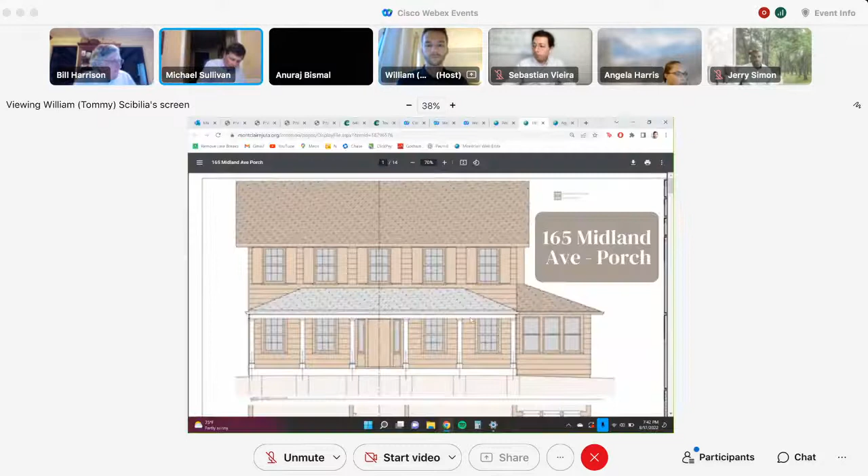My architect Daniel is on the line as well, in case he's needed. Did he call in, or did he? He called in by phone.

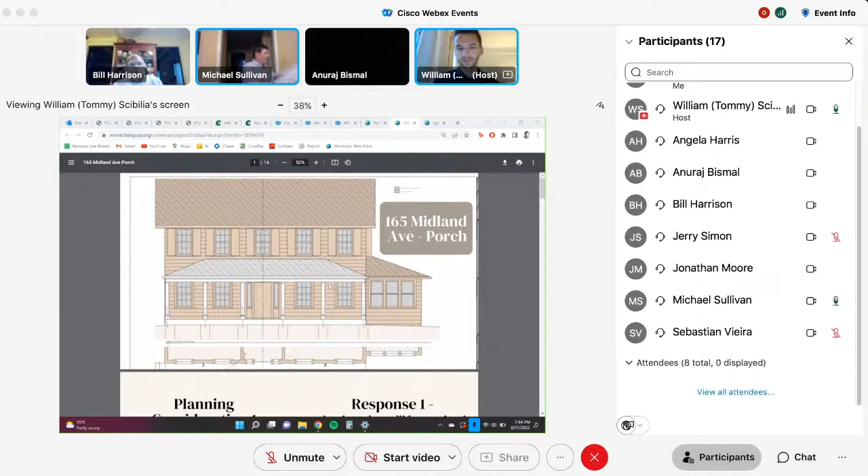Hello? Hello? We can hear you. All right, thank you. For some reason, the WebEx identification I was given was from last month, so I was trying to dial into the WebEx, but you've got me here instead.

Would you raise your right hand? Do you swear to tell the truth in the matter pending before the board? I do. State your name and address, please. My name is Daniel Kopek, 289 Bay Avenue, Glen Ridge, New Jersey. Mr. Kopek, you're a licensed or registered architect in the state of New Jersey, is that correct? That is correct. And your license is in good standing? It is. And you've presented before this board in the past.

I don't know if the applicant's going to present or you're going to present, but whoever is going to can start now. Okay, I'll start and you can chip in as needed. In this presentation, I took the planning considerations that were given to me, and I've prepared a set of responses. What you're seeing here is just an image of the drawing of the porches at the front of my house on 165 Midland Avenue.

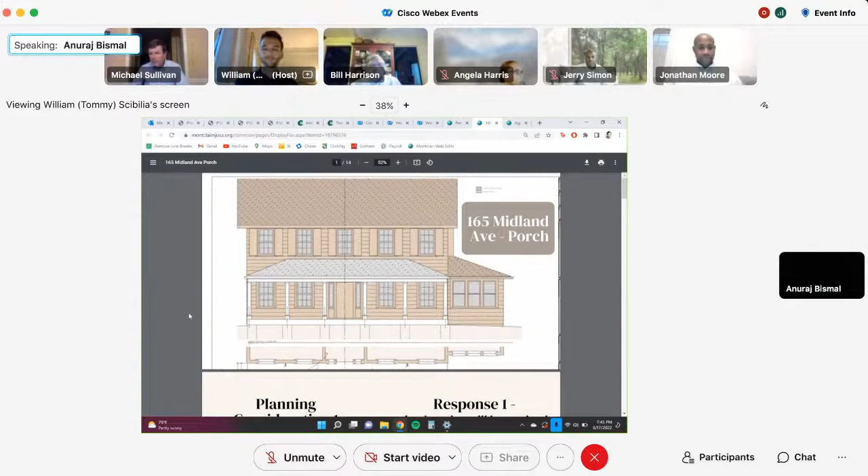On the next page, you'll see the response to planning consideration 1. The consideration is that the north property line contains a landscaping buffer between me and my neighbors, and it was unclear what we're going to do with that buffer. I've agreed with my neighbor that it's been there ever since I purchased the home in 1997, and we have no plans to change that. Her name is Christy Payne, and on the next page you'll see an email from her where she has responded back in agreement with that. So no plan changes to the landscaping buffer. I'll pause there if there are any questions on that. You can proceed. Okay, thank you.

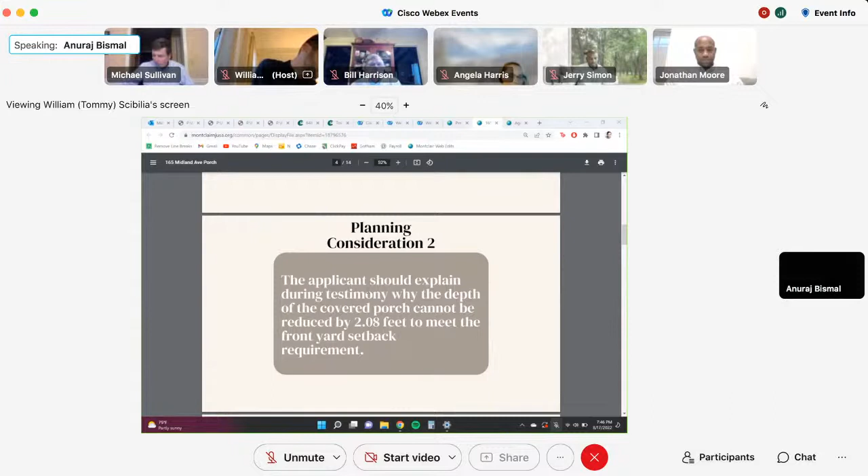Planning consideration number 2 is around the applicant explaining during testimony why the depth of the covered porch can't be reduced by 2 feet to meet the front yard setback requirements. There are 3 responses here. The next page is response 2.1. The first response is that the dimensions of the porch were designed to allow the inclusion of a dining table and chairs with sufficient access. I've shown a picture later in the deck of that table with the tape measure out at 10.5 feet, so if you want to flip down to that photograph, it's the one with the table and the red line. So it was designed with this in mind, for outdoor dining.

So we go back to the top. The second part of the response, 2.2, is that the extent of this variance varies along the front portion of the home. It's about a foot at the south end of the home and 2 feet at the north end, and this is because the house is not straight to the street, it was built a little crooked. You can see that if you flip down to the very last page, you'll see the diagram showing the red variance is narrower at one end and wider at the other, because the house is not parallel to the curb.

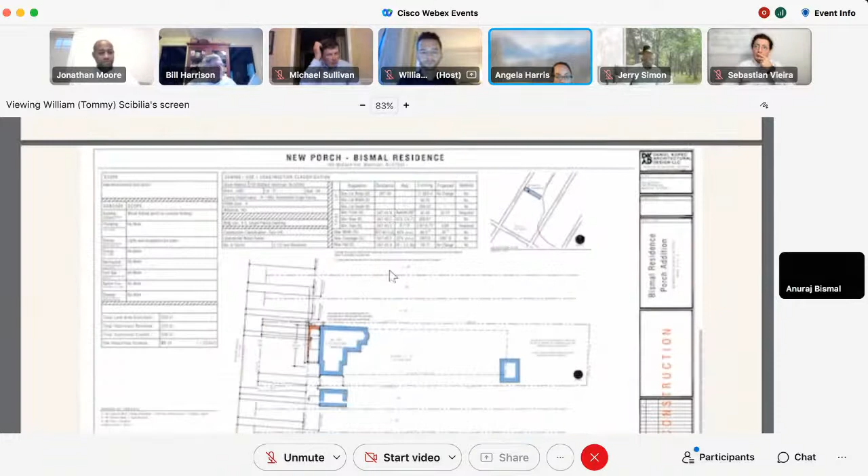So this is Dan Kopek, the architect. The existing home is a center hall colonial with a side gable facing Midland Avenue, with a central portico and steps, 2 steps down to grade. The intent is to remove that central portico and replace it with a porch that runs the width of the primary 2-story volume of the home. The porch wouldn't extend to the 1-story sunroom on the south side.

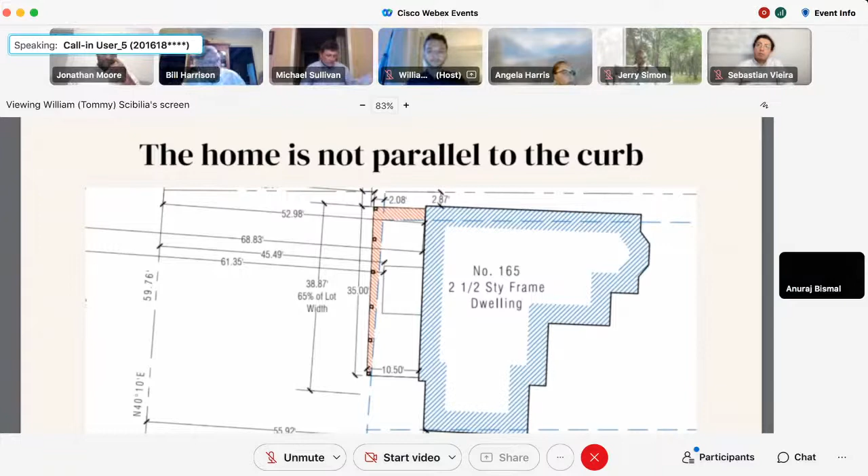The reason we're seeking the variance, as my client has enumerated, is the porch design would encroach on the average front yard setback, by less than a foot on the south side and slightly more than 2 feet on the north side. Given the existing placement of the home—and I'm referencing drawing number 2, the site plan on sheet G-100 in the submitted drawings—that drawing shows the site plan and a dashed red area of the porch that is both over the front yard and side yard setbacks.

Given the location of the current home, particularly the side yard setback, can't be met while making the porch properly fit the balance and symmetry of the existing structure.

And could the porch be made a little bit narrower on the front facade of the house by just spacing the columns differently, so that you can get closer to the side yard setback?

I worry—if we go to the second sheet in the submitted drawings, A-100, drawing number 1, the west street elevation—you'll see that the way the project has been designed, the columns line up between the windows and the door.

Structurally, I was very careful to make the project as minimal to the north side as possible, so the roof slopes back on that side. If I were to bring the north edge of the porch within the side yard boundary, that column would land in front of the window, which would mean the beam carrying the weight of the porch would come back into the building along the top of that window. Structurally speaking, we can physically make that happen, but it would just not look structurally correct to have the weight of that porch landing on the head of a window.

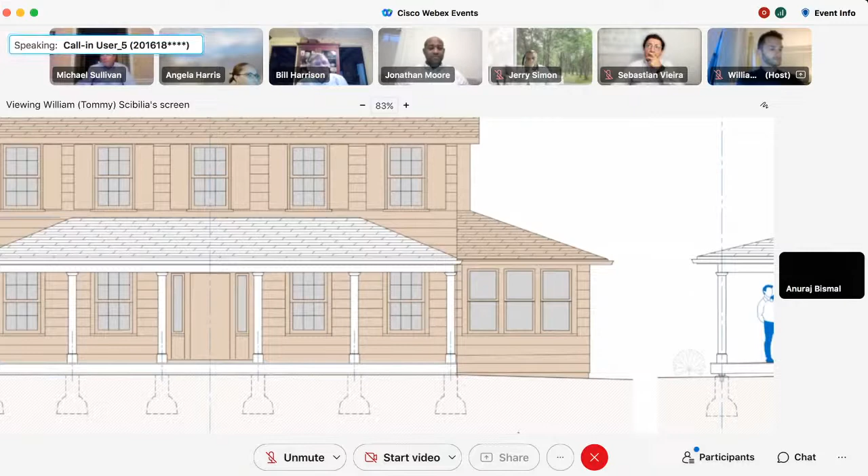Okay, thank you, I have no further questions. Okay, Mr. Moore, do you have any questions? No questions at the moment. Mr. Simon?

Yes, thank you. The current steps, are those within the side yard setback? No, the current stoop, yes, as shown, you can see it on the same sheet, A-100, drawing number 2, floor plan. You see the dashed line of the existing stoop in the middle there with the 2 columns that would be removed. That's only at the front entrance door, and it extends out about 7 or 8 feet from the house, and that's currently not in compliance.

It is currently in compliance. It is in compliance, okay. The front stoop is in compliance. The house is currently not in compliance because the house is built both too close to the north and south side yard setbacks, as you can see by going back to sheet G-100. I'm just referring to the porch right now. I understand the second, correct.

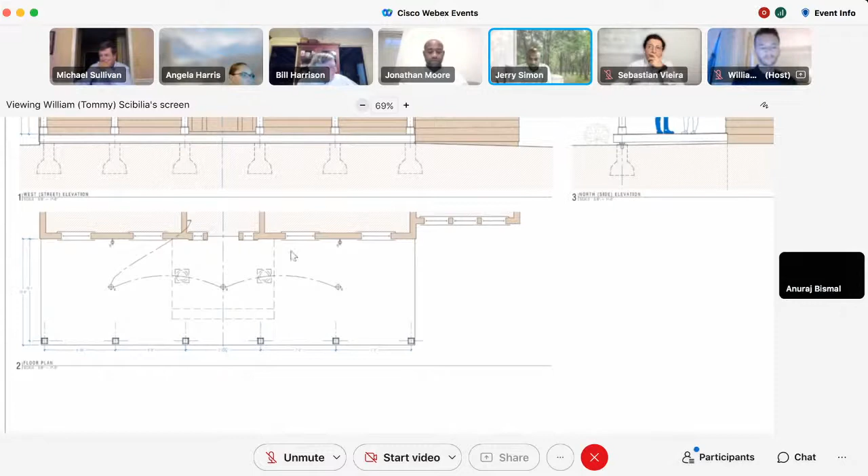All right, so regarding the neighbors' porches which the applicant referenced, do you know if those houses are set further back than yours, which would allow their porches to be in compliance? Are they all starting at the same level? On drawing number 2, site plan, on sheet G-100, I went out and measured physically from the curb to the front of the house and front of the porch of the properties, both north and south.

I shot that with a laser from the street, and where I got permission from someone, I used a tape measure to measure those. I measured those at one point, and as my client mentioned, his house happens to not be perfectly parallel to Midland Avenue, so it's possible there's some variation there. But those dimensions on that site plan were made by me in the field, both to the front face of the structure and the front of the stoop or porch, and that established the front yard setback, as I understand it from the municipal ordinance, to be the average of the 3 properties on either side of you on your side of the street.

So are they effectively at the same starting point? Well, you can see lot number 34, which is on the bottom there, is about 2 or 3 feet beyond the average. Lot 35 is slightly beyond the average. Lot 36 is about 2 feet inside. Lots 38, 39, and 40 are almost all exactly on that average line. So there is some variation.

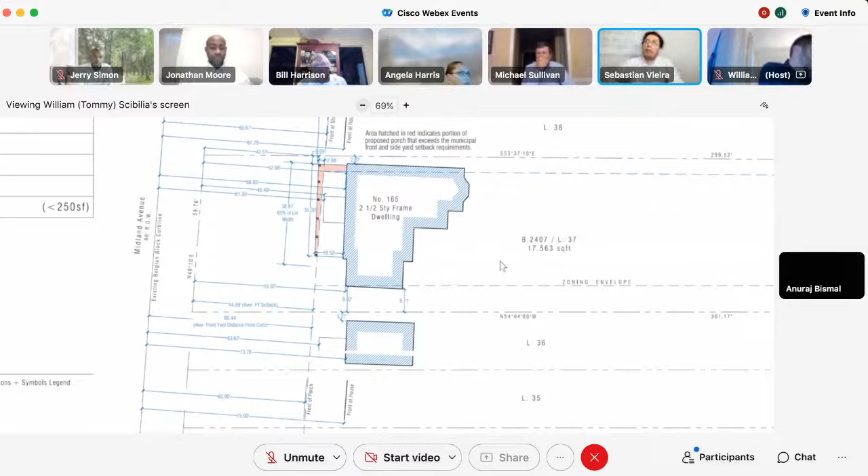Okay, thank you. Mr. Vieira, do you have any questions? Yes, thank you, Mr. Chairman. Just following up with what my colleague, Mr. Simon, asked regarding planning consideration number 3.

In your response, you say that the porch's northern line will bisect one of the windows. So my question is, did you consider another design where you essentially eliminate the 2 columns on both sides and basically shrink the length? Was that ever considered?

We looked at several different options here from a typological condition. Most of the homes, as shown in some of the photographs that my client has submitted, have either an entrance portico that covers just the central bay over the door, or a front porch that spans the full front of the house.

In my experience, I have not seen a porch that would span 3 of the 5 bays of the front of the home and look like an accurate proposal to add to a home like this. It's my intention as an architect who practices in town to make something that is complementary to the existing historic structures here.

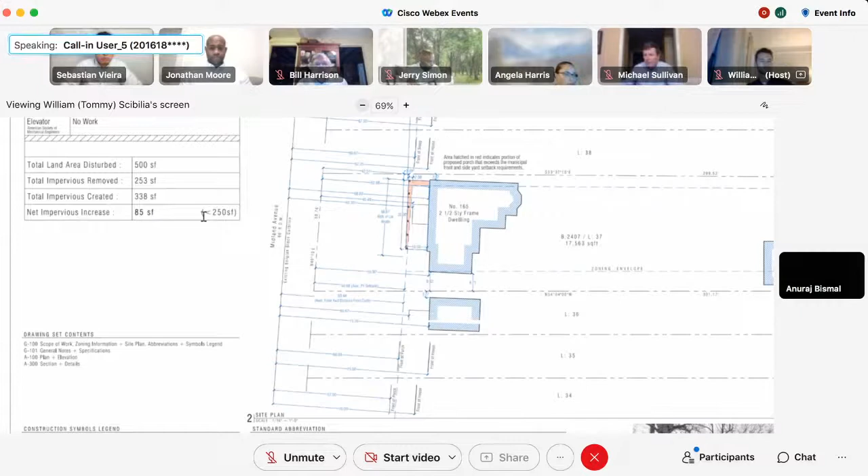Water would be distributed out into that same space. I don't foresee a stormwater issue from this improvement. Okay, thank you.

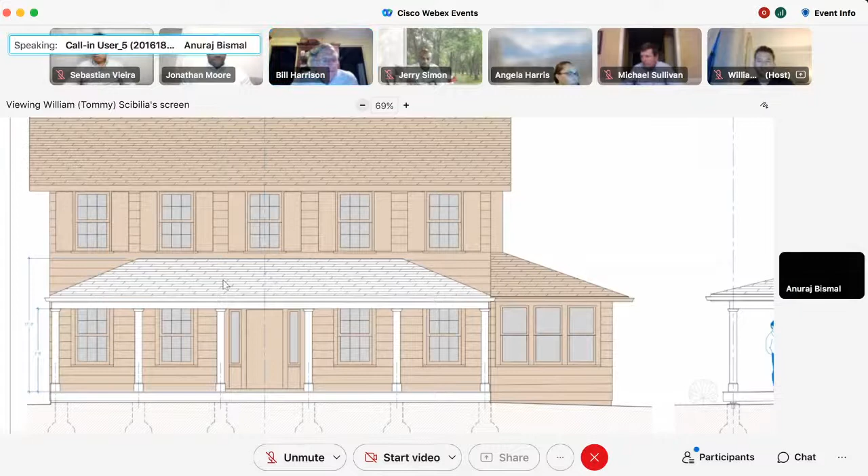Okay, I have a couple questions. Let me follow up on the stormwater. The pavement that's being removed is on the south side of the house, is that correct? Largely on the south side? It spans across, but it is mostly on the south side.

Okay, so just so I understand in terms of not being much of a net increase in total stormwater, but what is happening to the stormwater from the roof on the south side? On the north side?

The primary roof of the home has a gutter that spans across the front and leaders on both the north and the south side that discharge onto a splash block on the front lawn on both sides. And on both sides, it lands in a small bit of pervious landscaping, but there is a significant amount of impervious paving on both sides. The intent here would be to make sure that we distribute all of the roof leaders into the pervious planting bed.

Okay, so the splash structure, is that pointed towards the street? They discharge toward the street, correct? Are there going to be gutters and downspouts for the porch addition?

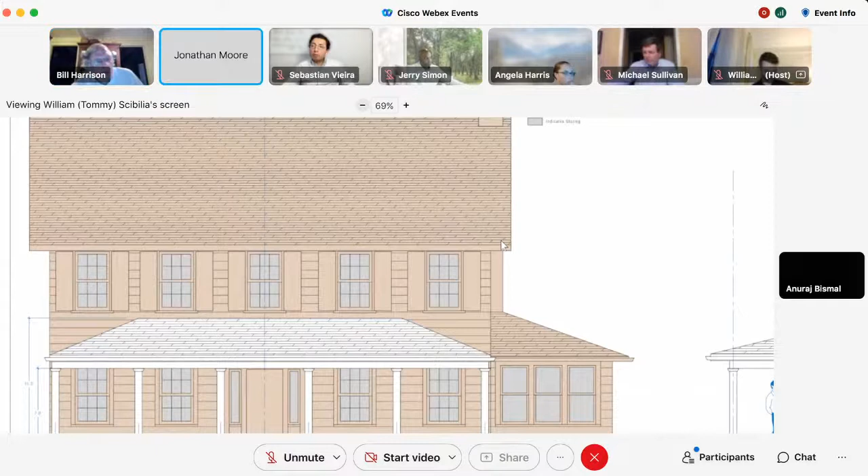Yes, there will be. There's a gutter noted on the cross section on sheet A-300. That would wrap all three sides of the porch, and it would discharge into that planting bed to the west, which is toward the street, but is 50 feet away from the street.

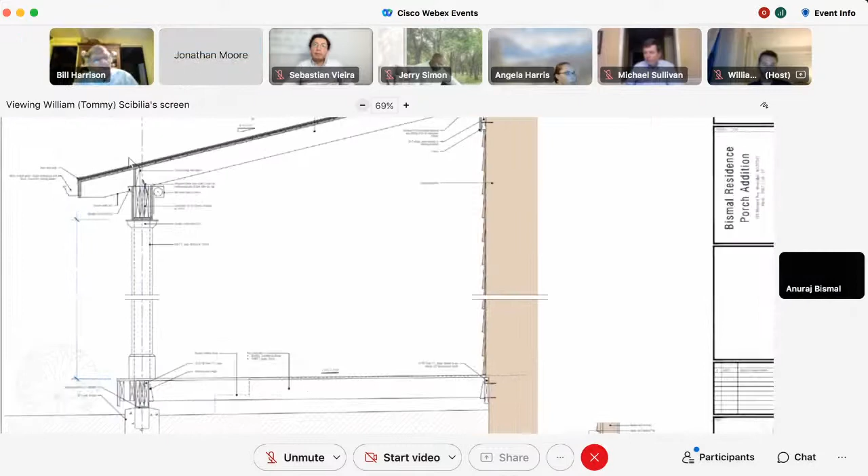You know, I'm not concerned about it reaching the street, so that it would go down. I'm concerned about the north side due to the proximity to that property line and the neighbor's house. It would go down. There'd be a leader going down on the north side of the porch addition that would direct into that planting area that will be partially relocated.

Correct. Okay. And then my understanding of the plans, you're indenting by a couple of inches from the edge of the house, which enables you to slightly increase the side yard setback on the north side. Is that correct? That is correct. Okay, because if you followed the line of the house, you'd actually be getting closer to the side yards. Correct. The closest point of the house is currently 2.87 feet, and the closest point of our proposed porch would be 3.09 feet. Okay. Any other questions from members of the board?

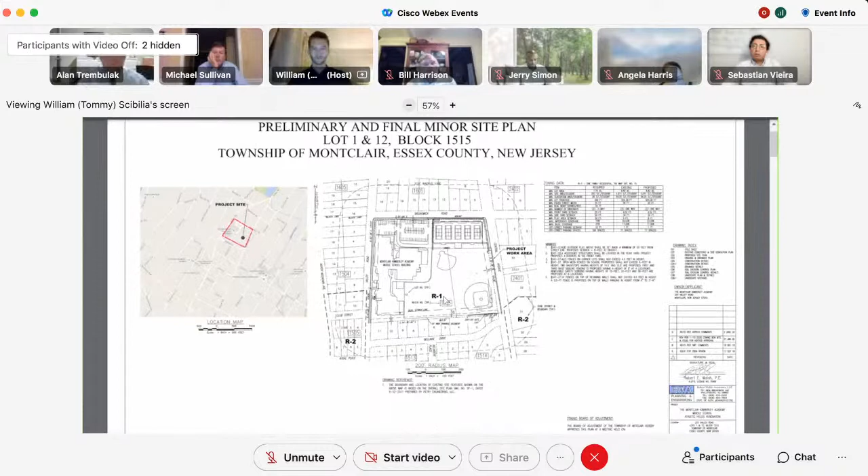Just trying to see if there's blue bubbles on this one. Sorry, no, that's an older version, I think. Okay.

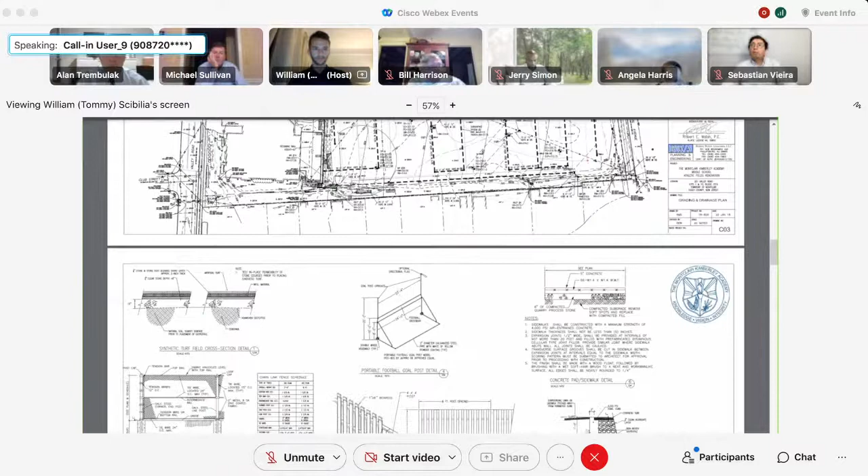That looks like it. I could see the bubble around the landscape notes on C1. Oh yes, okay, okay, that's perfect.

Perfect. All right, since this is slightly different because you have additional notes from the plans submitted to the board, I assume we should mark this as an exhibit, Exhibit A1. What sheet is that, Mr. Walsh, that you marked?

What I'd like to do, if it's okay with the board, is mark this PDF, which is the entire set of drawings with some blue marks on it. It's the same set that was submitted to the board, however there are some blue markings that I've highlighted to refer to comments made by the board's engineer. So you want to mark the entire set collectively as Exhibit A1, is that correct? Yep, we can do that. Excellent.

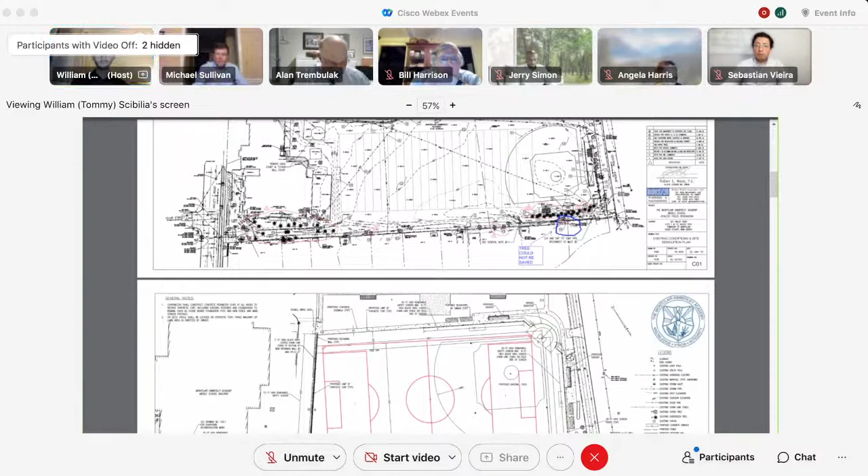Now, for the purposes of the revisions, this PDF has, with the exception of the field striping shown on the second sheet, we've bubbled and put a little triangle indicating the revision made to the plans subsequent to the March 14th submittal, in accordance with the resolution of approval.

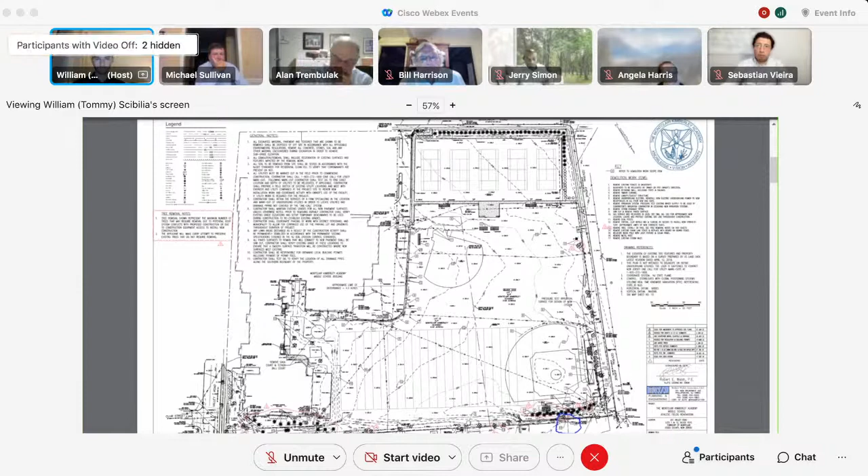So I guess we should go through the sheets individually. It's not bubbled on the first sheet, but we inadvertently neglected to update the lot coverage on sheet 1 in the zoning data from the tennis courts project, which occurred a couple of years prior to this project. So that's been done, and I think it's 0.12 acres of increased impervious coverage, which is below the requirement.

As any of you may recall from the tennis court project, we replaced 6 tennis courts with 5 and ended up getting a net significant reduction in impervious coverage for the property. On this project, we added some sidewalks and did courtyard work that resulted in a net increase of 0.12 acres. So that's been corrected, and I neglected to bubble that on this sheet, but it went from like 35.2 to 35.33 or something like that.

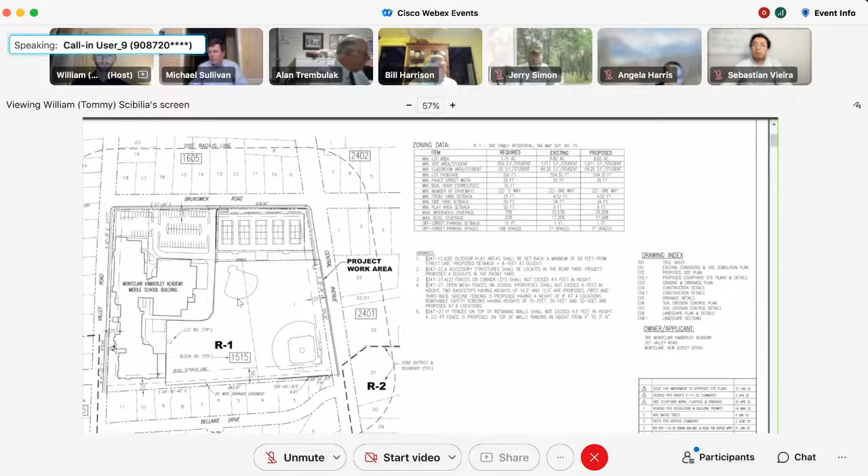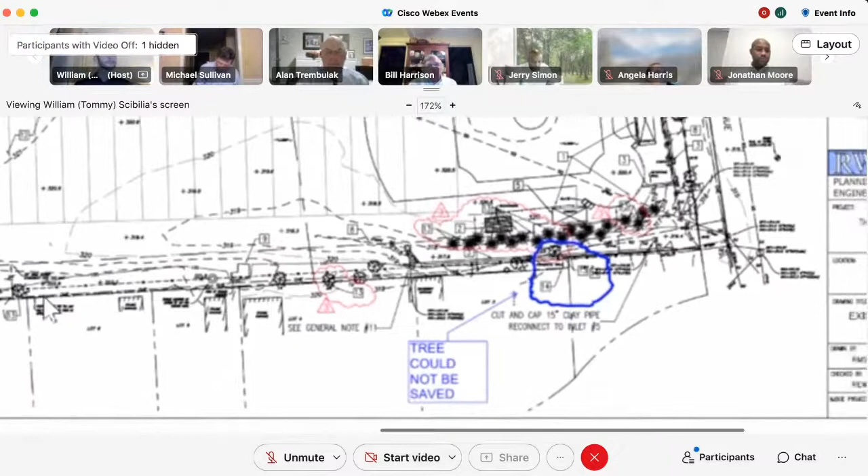So the next sheet is C01, which bubbles the areas of additional tree removal. Again, the reason for the additional tree removal is primarily due to modifications to the drainage. In some cases we were hopeful we wouldn't have to remove certain trees where we were installing new drainage, but it turns out the size of the equipment, doing the excavation, the backhoe swing capability to load trucks, just weren't able to do it with leaving all the trees in place.

That occurred in a couple of locations. Again, this plan has been revised with the red bubble showing the additional trees to be removed, with a note added in the upper left-hand corner, tree removal notes, that we're going to make every attempt to keep the trees and not remove them unless necessary. But I think we wanted to show the maximum extent they would possibly be removed.

As an example, if you look on the right-hand side of this C01, you'll see a 42-inch tree out by Central Avenue that the contractor was saying we absolutely had to take down. We fought with him, because we were putting a sidewalk next to it, upper right, and convinced him that he didn't need to take it down, just carve out a portion of the roots. So the sidewalk went in fine. That tree will remain, it does not have to be removed.

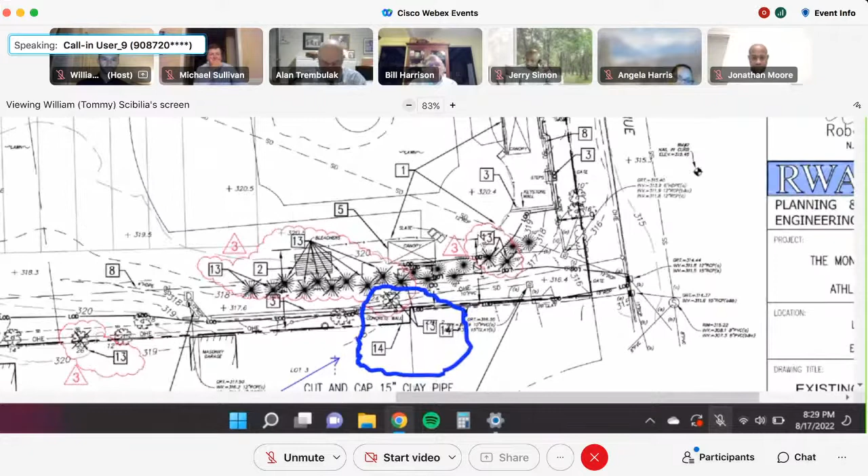And if we go down to the lower right-hand corner, unfortunately what happened with the base survey is we had located 10 trees in that corner, and we built the design around those trees, preserving the pine trees there. For whatever reason, the surveyor neglected to get 10 trees further to the west, basically behind the existing bleachers where that number 13 is. So those were added to the plan. Since we designed the turf limits and grading with the expectation there were no trees there, once we approved the shop drawings, everything's pretty much etched in stone. We tried to preserve them.

We ended up having to take out 4 trees initially of the 10, because of the limits of the synthetic turf. Now it turns out we have to take out the remaining 6 in that location bubbled in red, to accommodate the drainage and leave room for the trees we're proposing to put there, because we didn't think there were any trees there. That area, which we'll refer to on the landscaping plan later, is where those trees are coming out, but as originally planned, they're being replaced with new trees.

And we're adding trees right up to lot number 3. I think the property owner of lot 3, Steve Humphreys, had concerns about that, and he's since notified us by email now that we've got the replantings in there. From what I can tell, he's pretty happy with what we've done.

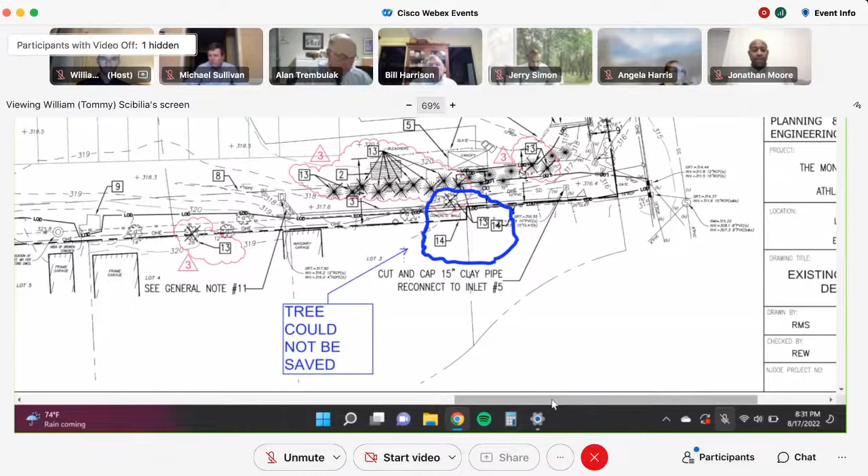Then if you go to the left, the one by lot number 4 was in the fence line, and there was no way to save it because we had to install one panel of the fence. So again, we're re-landscaping that end of the property. There's another tree that had to be removed, a 12-inch tree further to the left as shown on the screen, and that was a result of the need to install the new fence.

Now the area between the school gymnasium, the southernmost portion of the school, and the existing property line, we had proposed a storm inlet, and the 4 trees closest to the field, furthest to the east, or right - it was kind of wishful thinking on my part to think we could get a storm line in there. Those are evergreen trees with a significant canopy beyond what's shown in plan. We could install the drainage and trim the branches back, but they would die because it would impact the roots and overhanging branches too much. So those are being replaced. Those 4 in that group south of the building, furthest to the right, need to be removed based on the original approved construction. We had rose-colored glasses on when we designed it, and now the reality is they had to come out, and we're going to replace it with new landscaping.

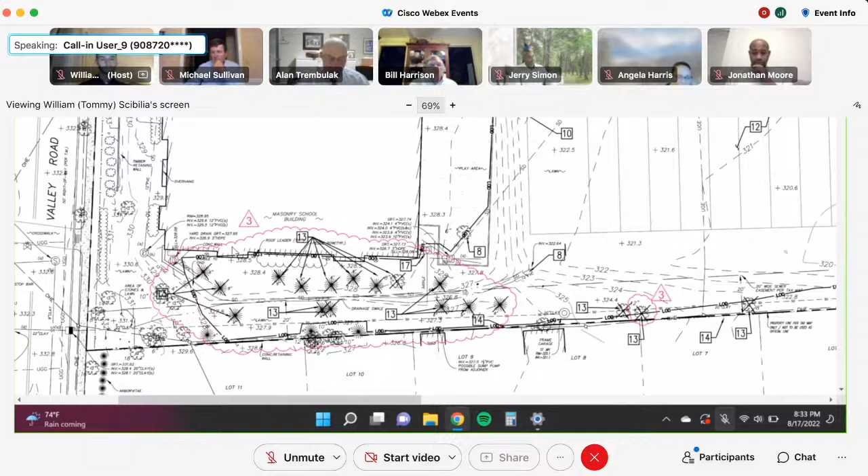Now the remaining trees in there - I'll refer again to the note in the upper left if you get a chance to look at it - we're going to try to keep as many trees as possible. We want to run the storm line up the side of the property because the floor elevation of the gym is 328.08, and the grade outside is higher. The grade from the exterior of the building to the low point of the existing swale is almost non-existent, because the existing vegetation and root system has spread out in such a fashion that it's blocking the overland flow. So we want to install an extension of what was improved up to the left-hand portion of the site. Marisa had asked me to turn on all the trees to be removed on the grading and drainage plan, which will be exhibit A2, which I'll show you later. Again, we think we need to remove these mainly because of constructability - the root systems and branches interfere with our ability to construct what we want to construct there.

So at this point, are there any questions relative to this existing conditions and site demolition portion of the A1 exhibit?

Why don't you go through your whole presentation? Because I think some of this - okay, going to that'd be fine. I'm good with that.

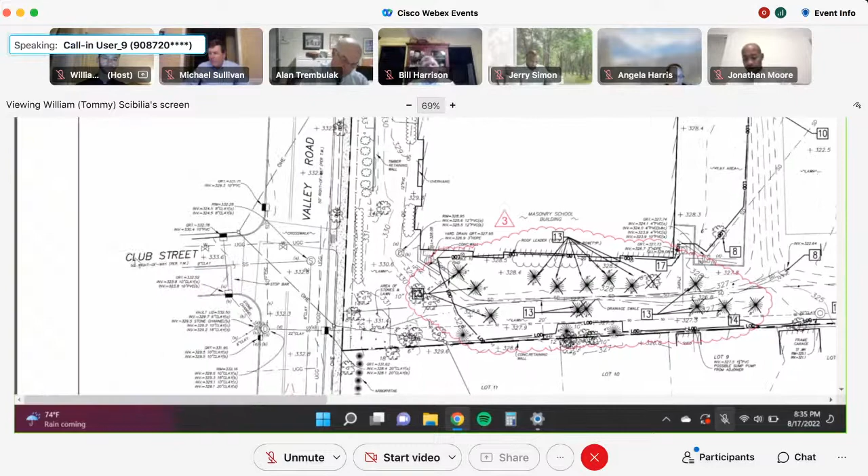So again, Tommy, if you just wanted to go up to the note in the upper left so everybody understands our desire to try to preserve the trees that are there. I'll just read it out: Tree removal shown represents a maximum number of trees that may be required for removal due to potential root system conflicts with proposed construction, or due to construction equipment access needed to install new construction. The applicant will make every attempt to preserve existing trees that do not require removal.

One other thing I'll expand on later is that there's a storm drainage line owned by the town that runs from Valley Road all the way down to Central. It's a 15-inch clay line. We didn't know the condition of it. We couldn't find it until we started construction because a lot of those trees were constructed directly on top of it. Fortunately, when we TV'd it, there were some cracks, it's an old line, but it was not blocked by root systems. It was a clear passage, no collapsing sections, although there was evidence of repairs.

That combined with the fact that there are aerial electric and telecommunication lines that run down that property line, serving the school as well as the adjoining properties. Those trees interfered with that, and it just wasn't being maintained in terms of storm drainage with the vegetation or the aerial lines.

So what we're proposing for the landscape plan on that southern boundary is shallow root evergreen trees that will get up to 12 feet or possibly higher, but try not to interfere with the aerial lines. Also trees that, if you had to remove them to do reconstructive work, can be easily replaced and don't have extensive root systems.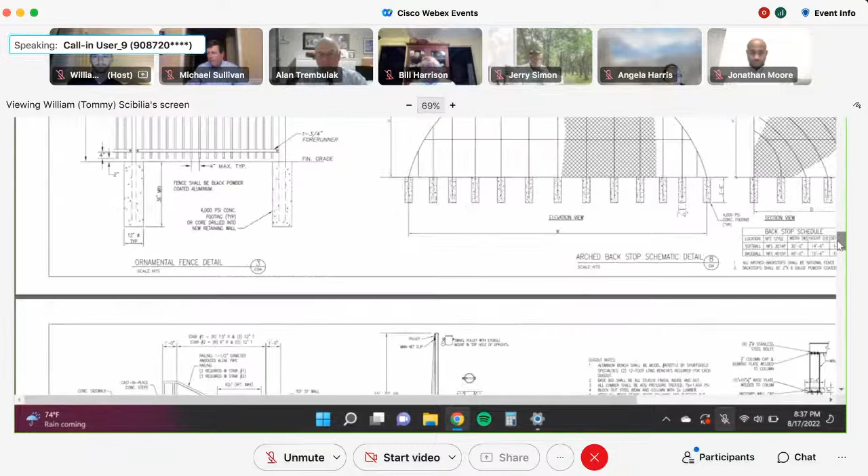If we go to this plan, nothing's really changed here. I've just highlighted that area in blue to show that - that's on C2 - those were the trees that were going to remain, except there's two more that got removed because we revised the drainage to avoid that area for existing or proposed trees we're installing.

So the bypass line that goes down to Central is now being run through the field. You'll see it on a subsequent area, but you can see how tight our soccer field is to the edge there. We want to maintain the originally designed grading just outside the limits of the synthetic turf. Again, that's in reference to Boswell comment 9. You can keep going, Tommy.

Now this is the courtyard, and a little bit about it. The applicant, in view of the extent of the proposed work, as kind of an afterthought, this plan got preliminary approval in February of 2020, was looking at the grand scheme of things and said we better rebuild this courtyard now to make it a more complete looking project. So it's not an afterthought to do this.

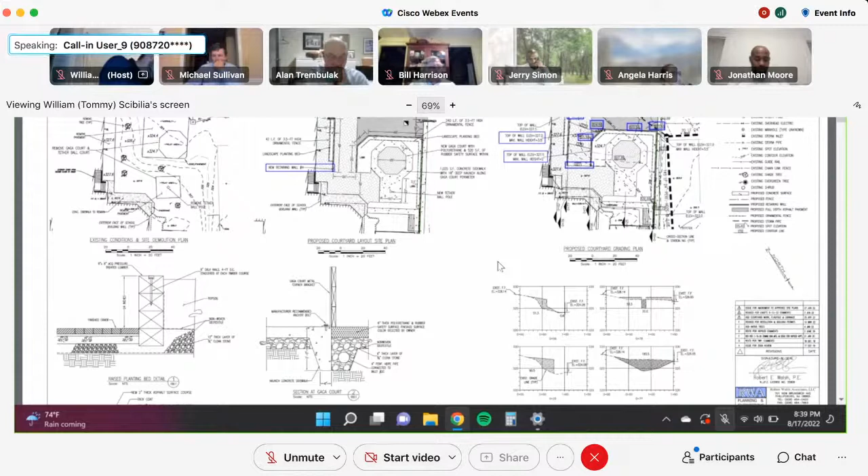What was done here was we leveled the playground area where they currently have the octagonal court, the Gaga court, to make it the same level as the tetherball and to provide ADA access between the two entrances in the building, and add some landscaping and brick pavers, to beautify it and make it match the new construction rather than be an afterthought. So in there we took down 4 or 5 small existing shade trees, but we're replanting that area, and you'll see that on the landscaping plan.

The blue areas relate to Maurice's comment that we had not provided bottom of wall elevations, but we've highlighted in blue the bottom of wall elevations, as well as the full height of the wall. The wall's maximum height is 3.5 feet in any one place.

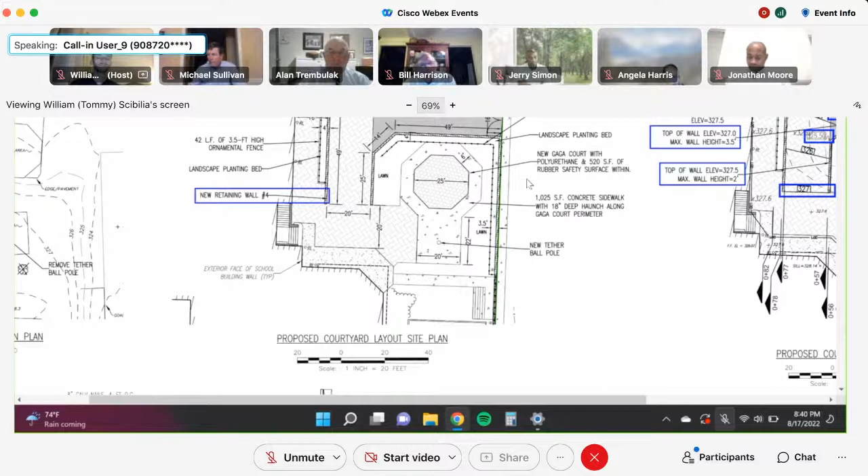Again, in keeping with the zoning requirement for the maximum combined height of a retaining wall with a fence directly on top of it, we offset the fence from the top of the retaining wall and put landscape plantings between the fence and the top of the wall, so we're not violating that ordinance requirement, except where the fence is directly on top of the wall immediately adjacent to the soft surface play area just south of this courtyard area. So we're maintaining that - I think the distance was 113 feet that we can have the fence directly on top of the wall. So that hasn't changed.

You can go to the next sheet.

So on this plan, in the upper left-hand corner, Marisa wanted us to show - if you can slide down the sheet a little bit - we're replacing that wall at the lower right-hand that channelizes the overland flow.

I refer to the profile in the upper left. Marisa wanted spot elevations, maximum top of wall, so we generated a profile which illustrates what we're doing there. It's basically a replacement in kind of the wall that was severely deteriorated at that corner of the property. We realized after the fact that we always had the removal of the wall, but I didn't recognize how functional that was in aiding the channelization of overland relief so it doesn't go onto the adjoining property. So we've included that in the project.

I would consider that a drainage improvement for the benefit of the adjoining property owners as well as the town. It's not bubbled on here because Maurice had already reviewed this on a prior submittal.

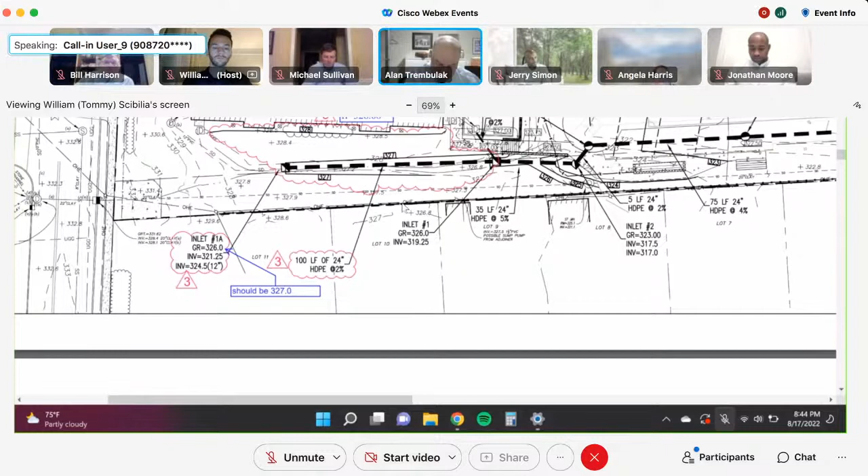You can go to the next sheet. Nothing's changed on here, everything's still the same on that sheet. Nothing's changed on the detail sheet for the dugouts. Storm drainage outlet structures and construction details remain unchanged.

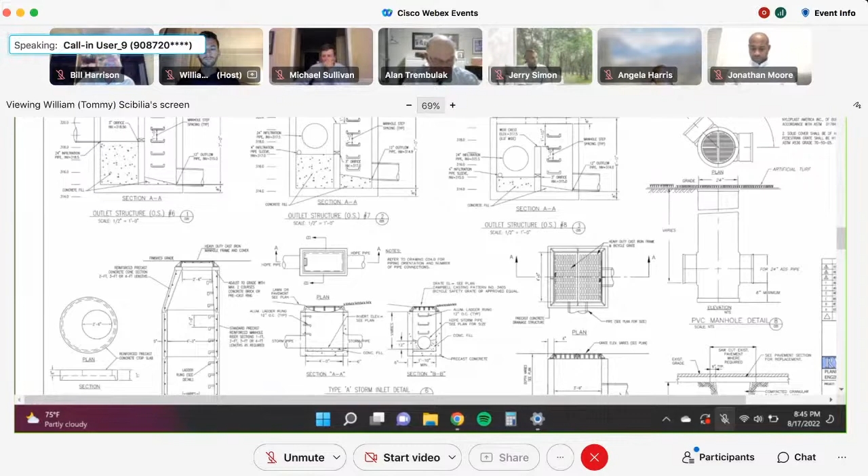The soil erosion plan, I have not bubbled it up, but this has been approved. We've sent this into soil conservation. It's identical, in terms of the storm drainage, to what's shown on the drainage plan. It shows the courtyard and has been certified by the Soil Conservation District. These are the details, which remain the same for soil erosion.

The section on the left, we've just added the storm pipe that was recently TV'd, and you can see the utility pole that runs down that property line. Our intent is to have the smaller shrub just above the pipe - a skip laurel, which is a year-round evergreen that does well in the shade, as that's a pretty shady part of the site. It gets to a maximum height of 12 to 15 feet.

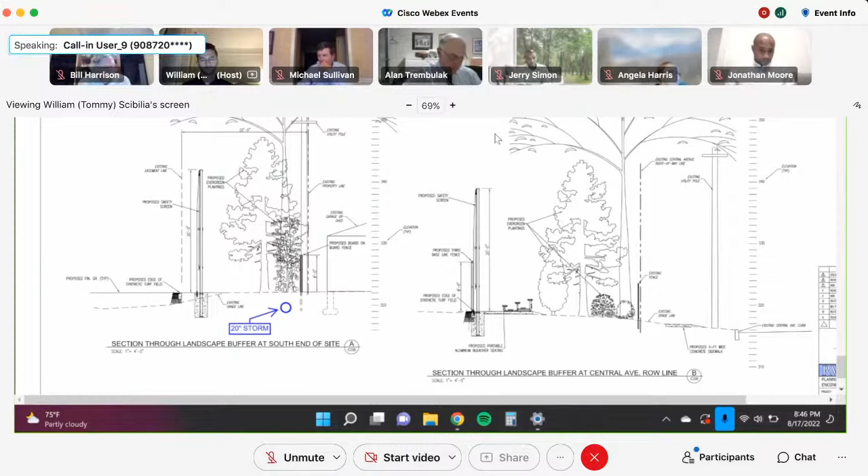So it shouldn't interfere with the above-ground aerial lines. As I've said earlier, the root system associated with them is kind of shallow, so it won't be intrusive. In some cases we have the green arbs, or giant arbs, which are similar, although they do get taller - they're an effective screen for the neighbors. I know the neighbors are concerned with the visual impact of landscaping, so we've maintained that, and I know there's a concern about native planting.

So if you go back one drawing, Tommy, you'll see that we put the sweet gums, which have the slender silhouette, ones that will grow tall and provide an overstory screen along the face of the building, leaving this area open. The area between the two levels of landscaping will allow for storm drainage maintenance in that area. If anybody remembers Hurricane Ida, no storm system can handle it below grade, so you need to focus on overland relief in the new world. That's why the desire to keep existing landscaping still remains.

And Tom, if you want to go to that other exhibit I did that shows all of the trees that are being removed, the ones that were previously approved, and then the ones now, the one-sheeter, there you go. So you can see, I think this tells a story with the blue. The one in the upper right, that's not coming out anymore. There are a few, and again, these are the combined previously approved plus what we're asking approval for now.

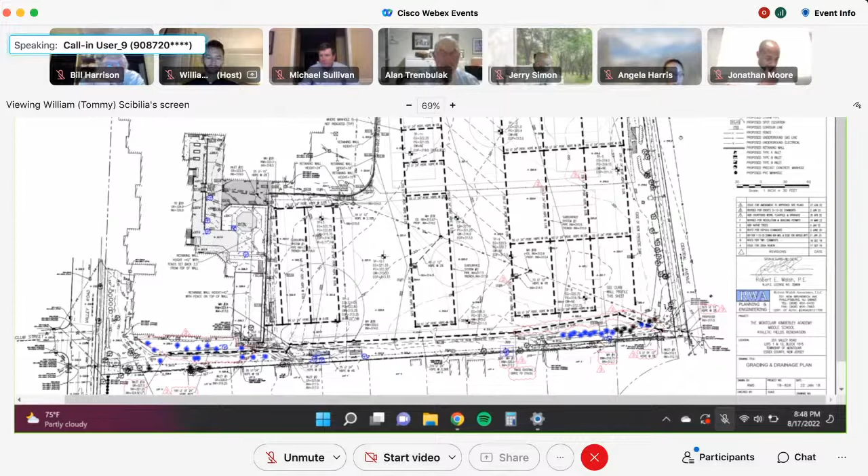And let's go to the lower right, if you could. So what we did here was this storm line that I've bubbled in red, that continued straight, and then it jogged right at the last blue tree to the right, and then went down out to the street. Once we found out that group of 10 blue trees that were missing from the plan but existing, there was nothing really we could do about it. And it may seem like in Maurice's comments, well, now that you moved to here, can't we keep those trees? Well, the thing is, they got to come out now because of grading and the limits of the turf.

But what we're doing is we're still, as originally planned, planning landscaping in there. And as I stated before, I think Mr. Humphreys thinks it looks good. What we've done by running, diverting, or deflecting the storm line into the synthetic turf limits over towards that triangle number 3, we selectively picked the best point to cut through the existing trees. So we had to take out 2 more trees, but again, we have landscaping to go back in there. And that's basically the story down there.

You have a tree that I put a blue box around by inlet or manhole number 3. That was for the fence. There's the one along the wall. That's a deciduous 24-inch tree just north of manhole, the written description for manhole number 4. That one was due to the curb that's getting replaced, the curb wall.

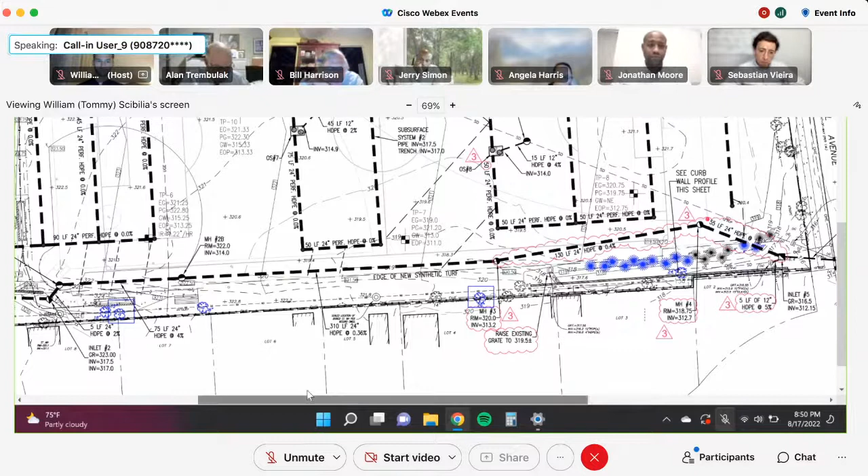And then you really have 2 trees that are getting removed and then replaced with landscaping that have boxes around them along the southern property line. The ones with the boxes are new ones that are getting removed. The other 2 were on the previously approved plan. And then, as I stated previously, all of the evergreens and deciduous in that area to the left are new ones that we're indicating may be the maximum amount of trees that we need to remove in that area, but we didn't want to short it, we want to just say this is going to be the max, and I refer back to the tree removal note.

We don't want to be overly optimistic like we were previously on the impact of trees. Okay, that's it for a summary on the plans.

Just a couple of follow-up questions. I think you covered most of the comments in the board engineer's report. Just a couple of things. Comment number 11 requested a videotape of the drainage. I believe that's been done and submitted. Is that correct? Yes, that's correct. It was performed on Friday, and I'm very pleased with the fact that it wasn't clogged and collapsed or anything like that. He was able to TV all the way from Valley down to Central, and we forwarded the results of that to Marisa and to Tommy and to whomever. I've briefly got a chance to quickly look at the first 100 feet or so of the videotape, and I think it's about 700 and something feet altogether.

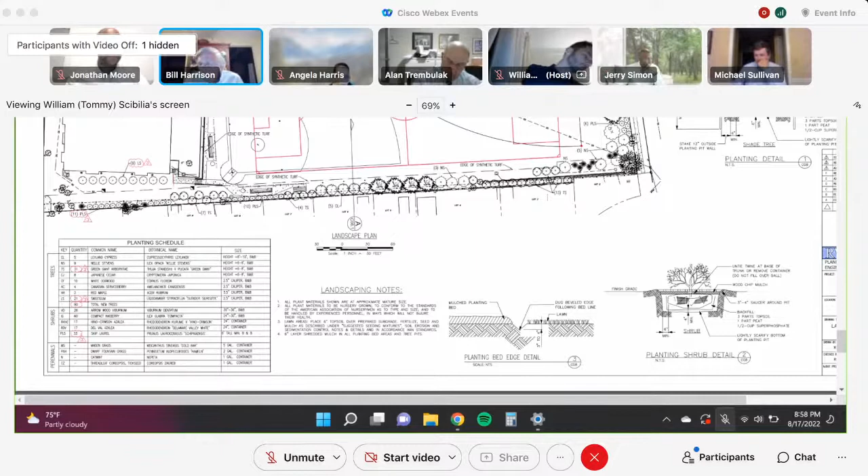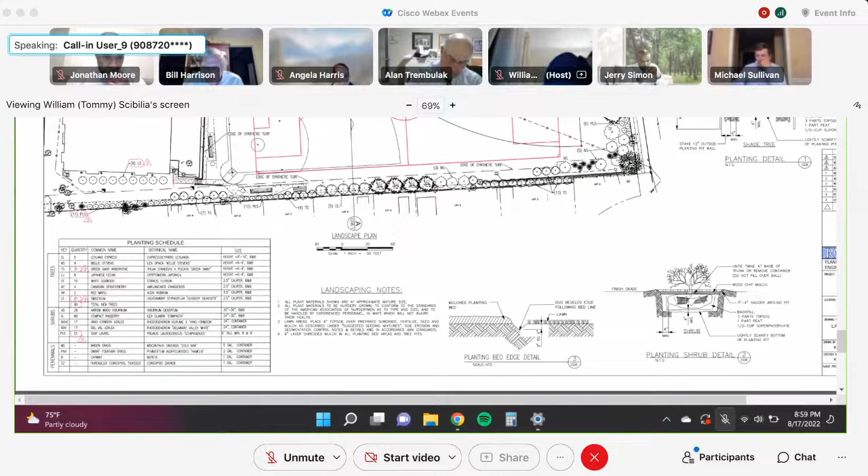Mr. Simon, do you have any questions? Yeah, just going back to item 7 on the engineer's report. It mentions what was originally planned was 3 24-inch pipes, and you're just reducing that down to 1. It seems like, okay, yeah, so I was being overly aggressive because the condition between the school and the southern properties, at that southwest corner, I had put in, rather than 1 pipe which is currently shown there, I had an overkill of 3 parallel pipes that I ran by Marisa, and she didn't have a negative comment about it. But then as we discovered that the 20-inch pipe was intact and we were providing appropriate grading there, and we felt as though, with the concern about the trees, we decided to take out 2 of the parallel pipes, so that would leave more room for landscaping or preservation of existing trees.

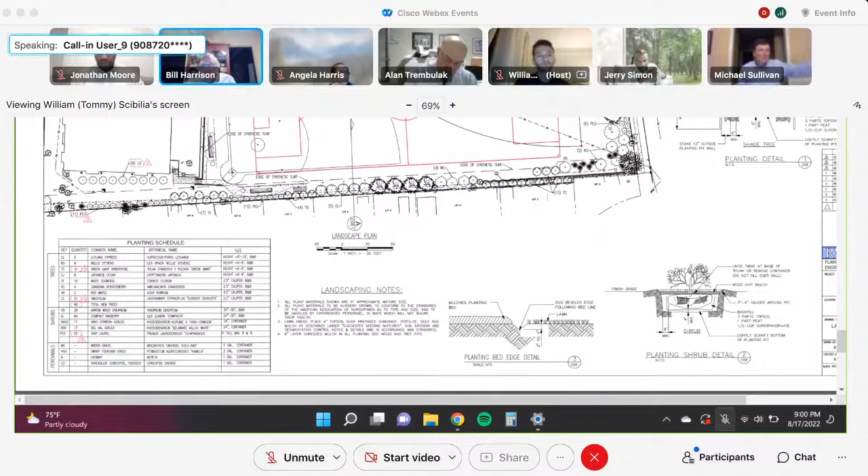So the 24-inch pipe is going to replace an existing 20-inch pipe, is that what you're saying? No, it's actually replacing, in that particular section of the site, a 12 or 15-inch pipe. It's labeled, I'm not sure what it's labeled there in that location. It's a 12-inch PVC pipe that runs along the front of the school parallel to Valley Road, goes into a manhole, and then it turns and comes out and discharges onto the field. We're picking up that pipe, and we're doing it with a 24-inch pipe, because it's picking up the overland flow at that point from Valley, as well as whatever's in that 12-inch PVC pipe.

So then, if you're not, are you still intending to remove all 15 trees that was specified with the original plan? Again, we're going to rely on our efforts to maintain the trees. See, the problem is we have a contractor on the job who says, 'Oh, well, I'm not going to be able to get a machine in there, I can't move this,' and we have to work with the guy every day and say, 'Listen, you could still keep this tree, or maybe we just take these branches off.' So that's the basis of the note.

And again, in that one area of the site, we're installing new appropriate landscaping, and we're making room to put the one pipe in. And to Marisa's point, those 3 blue trees furthest to the left, they may very well be able to be kept.

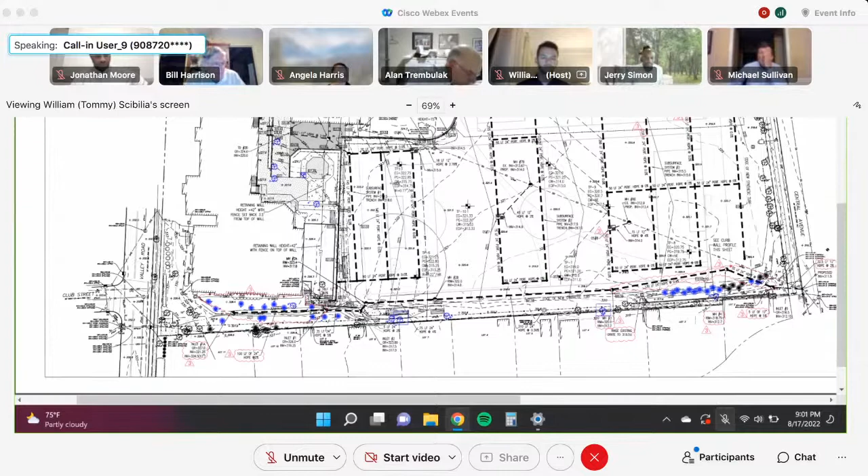I don't, as much as it shows like a little symbol for a tree, they're bigger than that. So when they put that storm inlet in, we didn't want to have to come back and say, well, it turns out we have to take out one more tree and go back to zoning. So again, I think we're going to try and keep them, but that represents the maximum that we would remove. And if we do have to remove it, we feel we can put in more trees, the native ones, closer to the building.

Regarding point 8, it mentions the trees along the fence line. Now that fence is already in place. Has that part already occurred? Yes, so those trees were removed, the fence is in a straight line, and the trees that required removal are only 2 additional trees due to the fence, and 1 additional tree due to the wall that functions to channelize overland flow. So those trees were not award winners, if I must say.

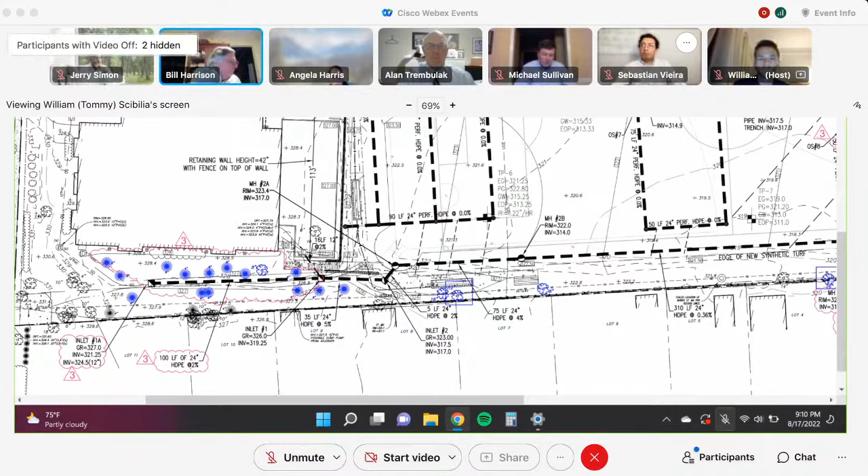And the landscaping that's been planted there over the years has become overgrown, and the root systems—if you look at the planner's report, it has photographs that illustrate the root systems are right at the surface, creating a roadblock to overland relief and allowing the flow to just spread out in any direction rather than channelizing it towards an inlet. In this way, it's going uncontrolled onto the adjoining properties as well.

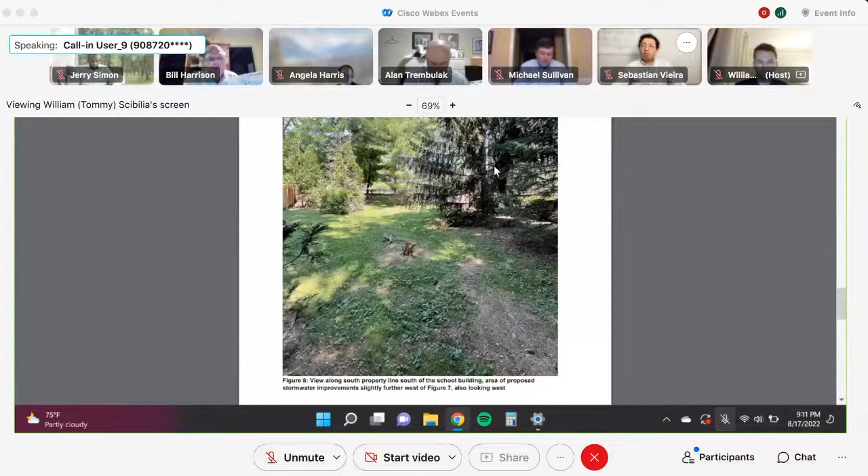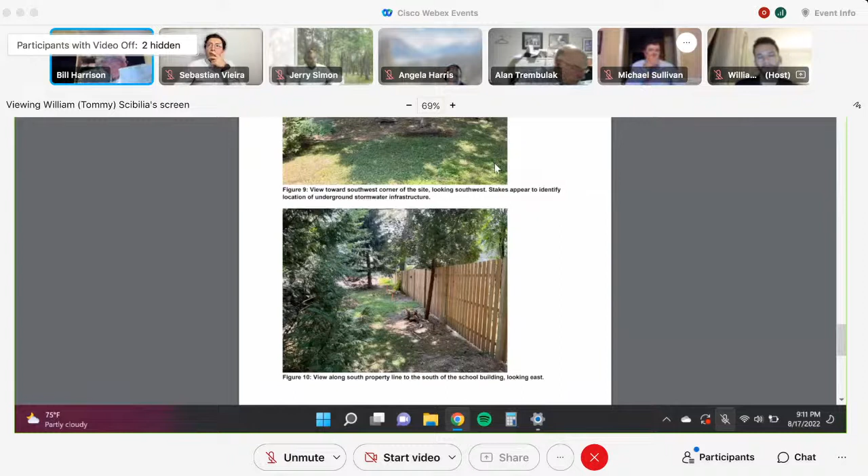So I think—keep going. Yeah, it's in this area. I'm trying to match up your drainage plans, your demolition plan, your proposed planting plan. And you appear to be running the pipe in the middle of where the existing trees are.

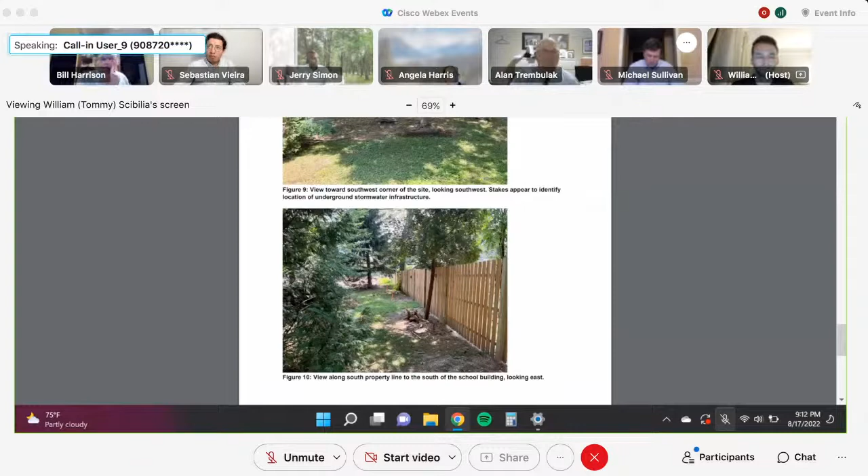Is that correct? I would say, yeah, we're running it where there is—although it's not a well-defined swale—some form of swale there. We're running it in between the trees. In theory, if you look at what Tommy's put up as our A2 exhibit, that's the blue trees turned on with the pipe, the pipe doesn't hit any of the symbols, but in reality, the trees are larger than that and they grow into one another.

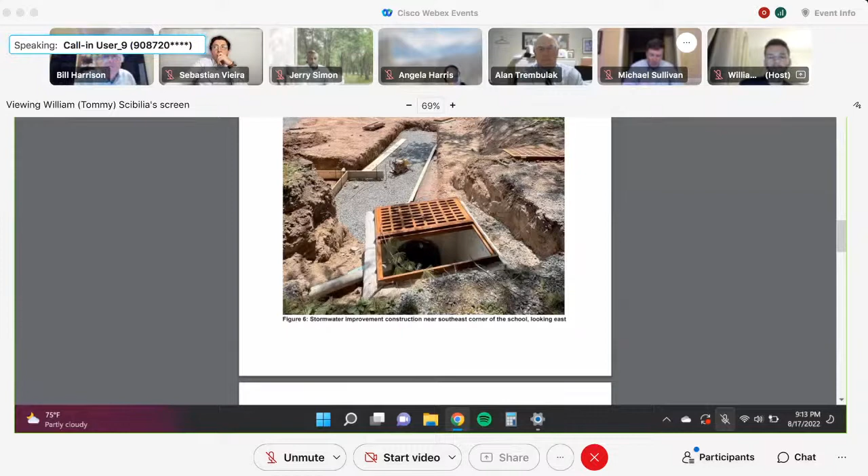And again, from a functionality standpoint in terms of installing the drainage—now, has that pipe and those inlets already been installed? No, we have not installed anything on the south side of the building, just up to inlet number 1, what was previously approved. So in essence, what we've done in terms of drainage is install everything virtually as previously approved. This extension hasn't been constructed yet because it potentially requires the removal of those trees, and we have not done that work.

So the line makes—so you've built up to where the jog in the line is? Let me see. And you're looking at the plans that were submitted as part of this amended application, correct? Correct.

So we are—so you go slightly. Your plans, you have a black and white copy, so you can't see the redness of the bubble. But if you look at where it says inlet number 1 has a grade elevation of 326 and an invert of 319.25, it's right next to the tag for lot number 10 that calls that out. That's as far as we've gone.

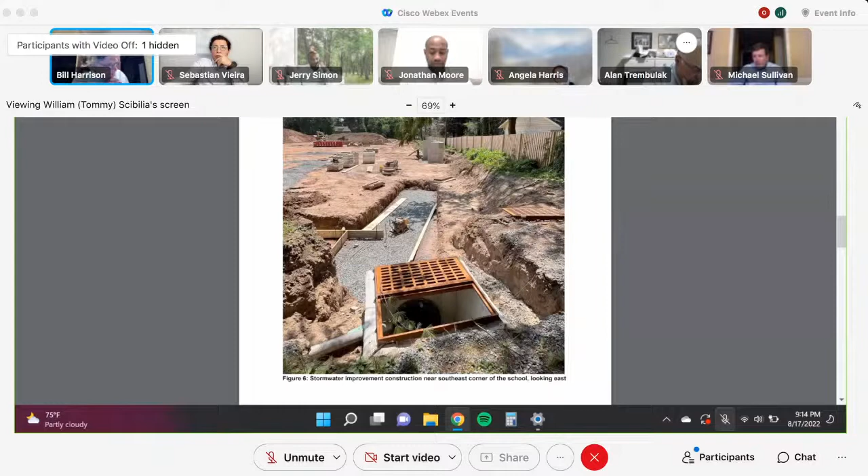But you've done that jog in the pipe, which I assume was to get away from the stairs, where it goes underneath the sidewalk and it's by home plate, kind of. Did you consider jogging it back so it would be closer to the building, or jogging it the other way so you'd only have to move one of those rows of trees that are on either side of it?

Well, what we were thinking is that you can see in that line there's a dash line that says SD, although the text is very small. That's supposed to represent the existing storm line that comes from the 20-inch clay pipe that comes from Valley. We created a separation between those two lines so you can potentially put a row of trees in there, another row of trees if need be. Or, depending on the condition of the trees and the clearances and whatnot, some of those trees could remain.

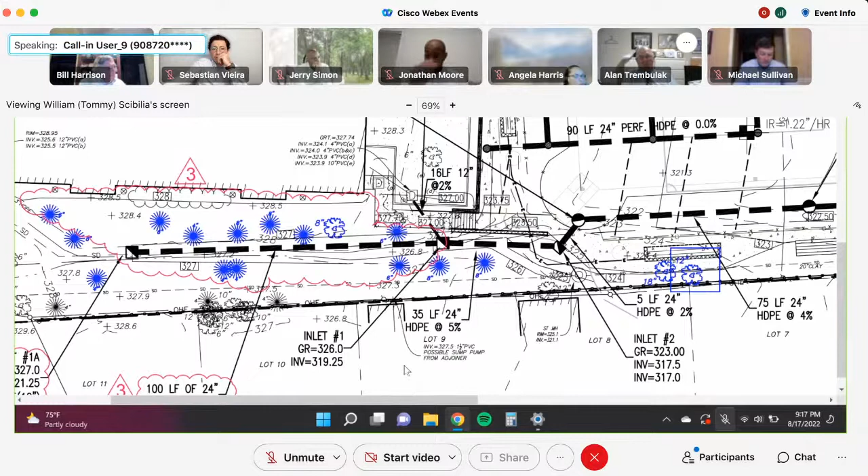Does the power line go all the way down to Central Avenue? What happens is, let me see. The power line is electric service from Valley down to Lot 7. There's a utility pole just right on the property line between the subject site and Lot 7. Then there's an underground service that goes and feeds the school. From that point, it's overhead wires.

I'm told that could be electric as well as cable, but it's definitely cable. At some point, it's only cable. But I'm not certain, though I know it's power. There's an above ground utility line that goes down to Central regardless of which, all the way down that property line. Yes, that's correct. But you're planting other trees along that property line. Yes, we're trying to do trees that won't require you to cut big hardwood trees to make a hole for the utilities to be maintained. They could be trimmed to a shorter height but still be an effective screen.

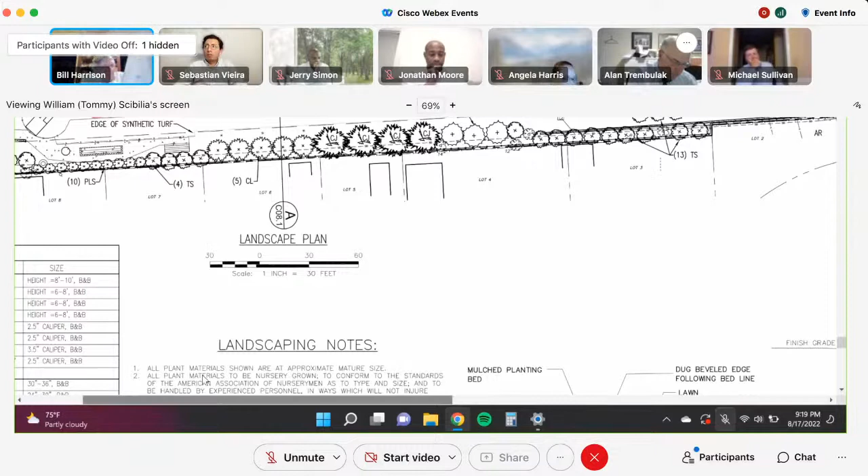To go back to the area adjacent to the school, what other alternatives were considered? Previously I had a scheme that called for, instead of one length of 100-foot pipe that goes from inlet 1 to 1A, two other pipes on either side of that that would function as an infiltration system to collect overland flow and infiltrate it. It took up much more space and would definitely require removal of all those trees as indicated on the plan.

So now we've got it, we're just going with the one. We think it's sufficient. But as mentioned earlier, we don't want to have to come back to the board because we missed a tree that absolutely needed to be removed. I want to rely on our efforts to maintain whatever trees are there to the best of our ability. It becomes a constructability question more than anything.

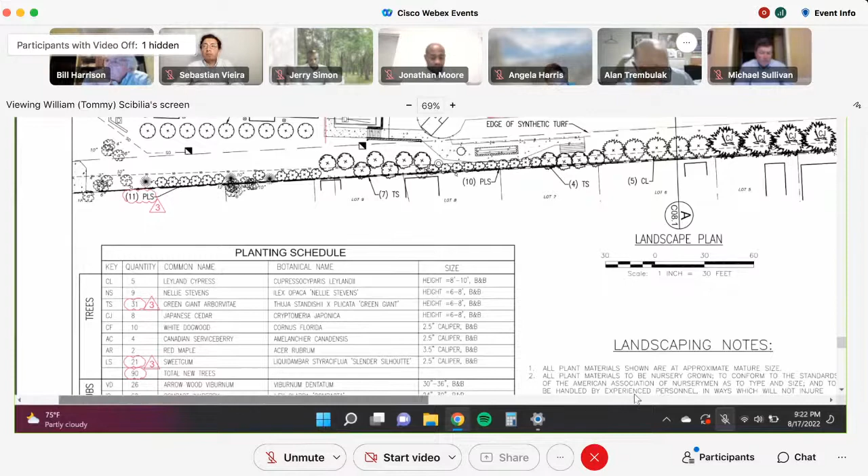Okay, the southeast corner, why can't the pipe go straight rather than bending to where the trees are? Let me see. If the pipe went straight, let me just go back to that sheet.

What we're trying to do is deflect the pipe to the north, so that in the area where some trees will remain, we still have space for tree replanting without a pipe going through there. We could run it straight, but we still had a plan to deflect it and run it parallel. The original plan was to run it straight, and just before it got to the trees we knew were there, it would deflect southward to the southeast and parallel that little wall, tying into inlet number 5.

But we felt it was best to put it under the synthetic turf so it doesn't interfere with the growth of any proposed trees, making a sharp cut through the trees rather than running parallel and affecting all of them. So we've ensured that the area meant to remain a natural green area has adequate room for planting, saving the trees to the maximum extent we knew were there. We want to replant that area, and we've indicated that on the landscaping plan.

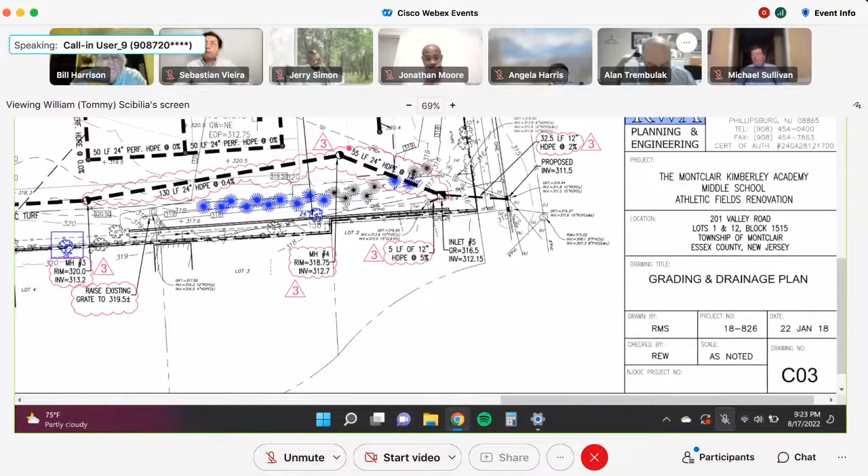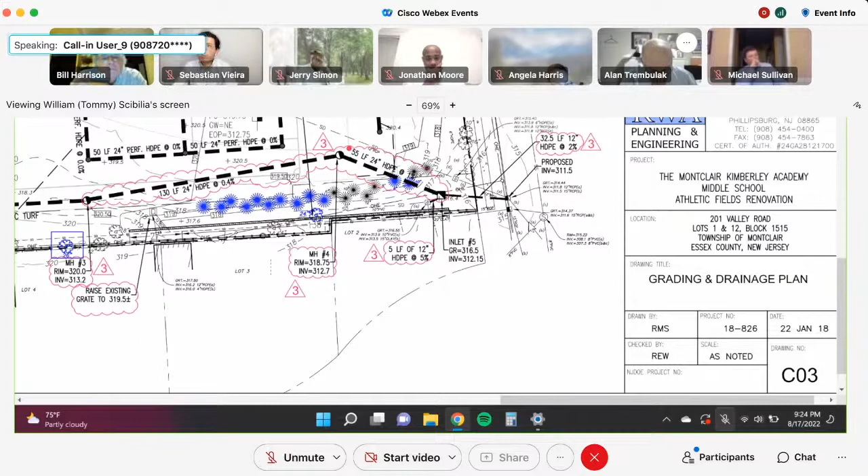That's not my question. Where the pipe bends towards the southern property line, why can't it just go straight out to the street and not go through that area of trees? Because all the drainage, the three subsurface drainage systems, tie into an existing 20-inch line, shown as a light colored dashed SD, a section of 55 lineal feet of 24-inch pipe. We basically stopped it right there, then paralleled the existing storm line because we don't want to change or interfere with that existing line. So we paralleled it and tied in at Central, because otherwise it would be an interference, we couldn't cross it.

But you're building a new inlet. Yes.

And then how are you connecting to the existing storm sewer? We're tying into the storm sewer in the street where the proposed invert is 311.5. That inlet's being installed - there's an existing little tiny inlet there that we're tying in.

That's the area paralleling the wall where the overland relief is. Rather than have any overland relief running along that curb wall discharge out into the street, we're picking it up at that inlet, adding another point where it can go underground without crossing the sidewalk.

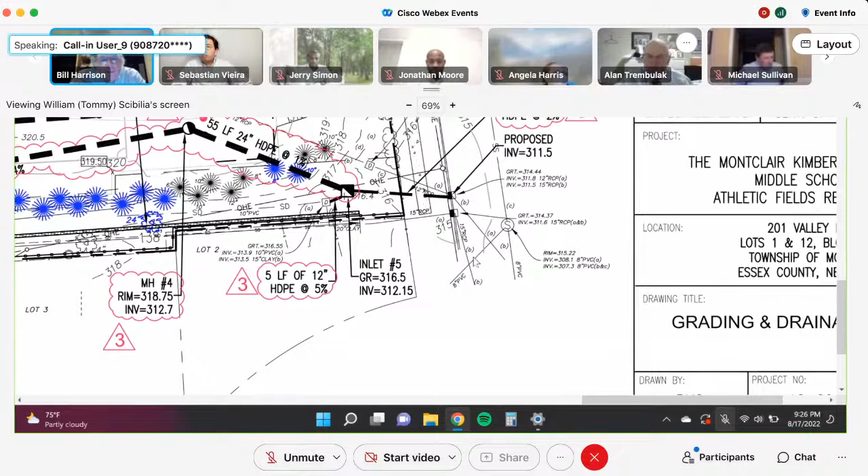It's the beginning of the natural channel on the east side of Central, where there was historically a stream. But to get there, how is the stormwater getting from where it's leaving your property to this large culvert that goes under the road?

You see on the screen where that sanitary manhole is. Immediately to the left of that there's an existing inlet that says a 15-inch tying into the back of it, but that's really the 22-inch or 20-inch terracotta pipe. It may appear to be a 15-inch pipe, but then it turns into a 20-inch clay pipe - that's the line coming from the town line.

And then the next inlet further up the street is the 12-inch line that comes in from the athletic fields and from the school building. We're tying in at that location with 5 linear feet of 12-inch pipe.

Okay, so in a major storm, when there's going to be a lot of road runoff going into the existing storm sewer, is your stormwater going to back up onto the property? It currently does now - I know that.

The point of this project was really to fix the town's existing drainage problem. So we're reducing the flow that's coming from the school's project, and we're conveying the flow that already flows through the site and makes it to those inlets.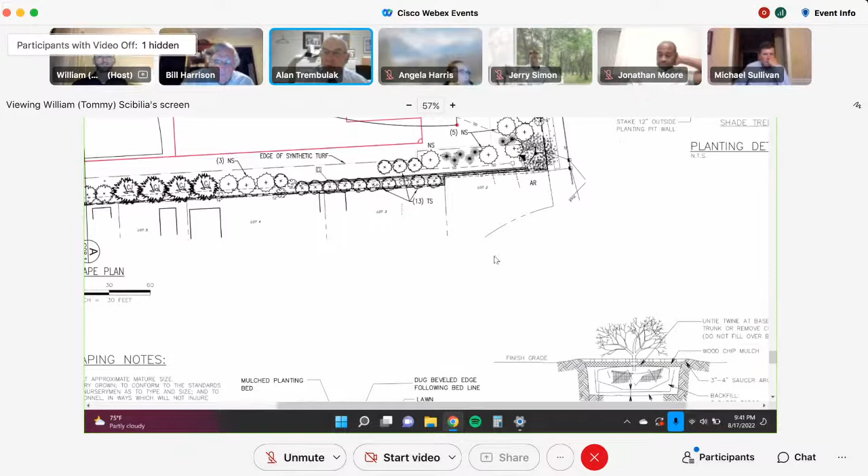Jim, are you there? Can you unmute yourself? Can you hear me? There you go.

Yes. Okay, would you raise your right hand? Do you swear to tell the truth in the matter pending before the board? Yes, sir. State your name and address, please. James Castelli, 228 Orange Road, Montclair.

Hey Jim, just remind the board as to your position with MKA. Yes, I'm Director of Facilities and Director of Security. Okay.

You heard Mr. Gilbert's comments. Do you have any knowledge or familiarity with the issue he mentioned regarding the privacy shield? Yes, sir, I do. We've been in multiple conversations through emails.

We were going back and forth trying to get a resolution, what was good for them, what was good for us. My most recent email to him was on August 12th at 8:24 a.m.

I asked him if he was available to meet at 9:30 so we could look at the fence situation. I said we'll be able to remove the wood fence along your property line. Let me know if you're available. I never heard a response from him.

And I also called him and left him a voicemail. I don't know if he received it or not. But yes, we absolutely said we would take that fence down.

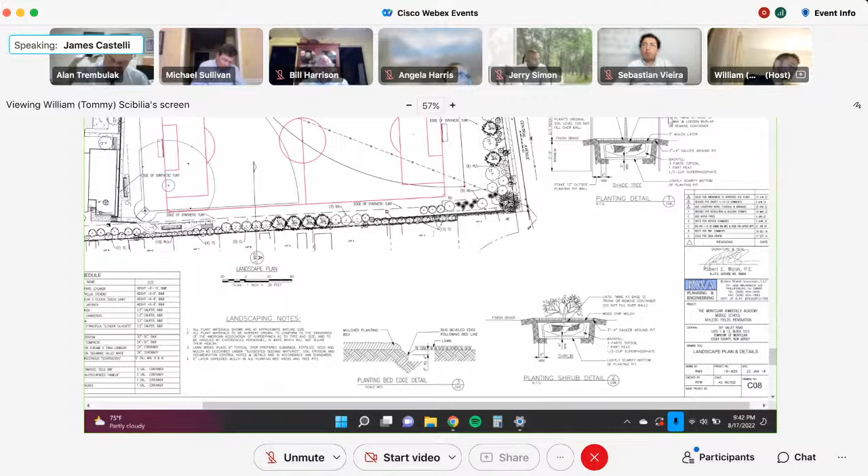We offered him, we were going to put up a black aluminum fence so it would look nicer, and he could keep his screen. We never said he had to take his screen down. Of course we want him to keep whatever he has there. But if they feel better with us removing that portion of the fence, absolutely, we said we would do it for them.

Okay, I think that's all we would have to say in response to that, Mr. Chairman.

Okay, do you have any further witnesses? No, we do not. That completes our case.

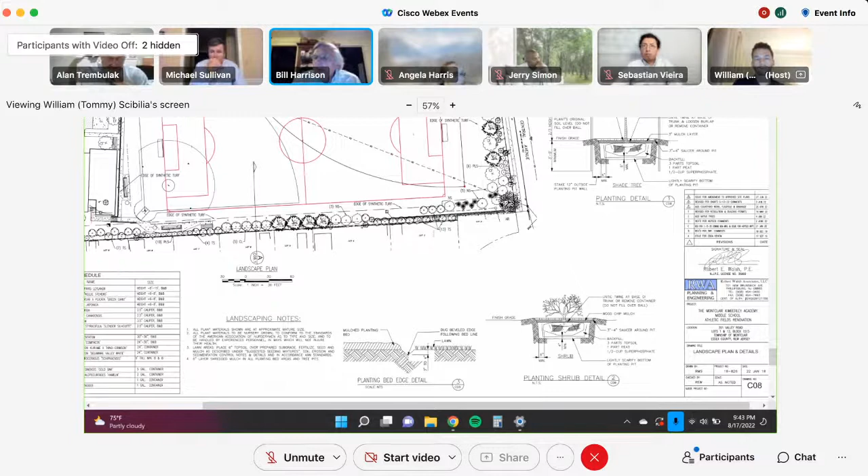Okay, I'm going to open it up to the public one more time, and then you can do a summation. Are there, again, we're going to unmute anyone who's called in, and if anyone's watching on YouTube or channel 34, please call into the number on the screen as quickly as possible. But if you have anything you want to say now about the application, this is your opportunity.

Yes, this is Mr. Gilbert again. I just want to clarify, because I think we're talking about two different things here. Mr. Castelli is referring to the temporary fence, which is already up. What we're talking about is when you're moving forward to the permanent stage and the permanent fence. Mr. Castelli has provided me with what they plan on placing as a replacement fence between our two properties, which is a vertical fence.

Aesthetically, I don't have an issue with that. The only issue is that because it's simply a vertical fence, privacy is a significant issue. What we simply requested was that they replace in kind the privacy shield. It shouldn't be something we should have to bear in supporting their project. I feel that's a fairly reasonable compromise, seeing that our preference would otherwise be to leave the fence alone the way it actually is, for the duration. But we're more than willing to support the project as long as it doesn't compromise our privacy.

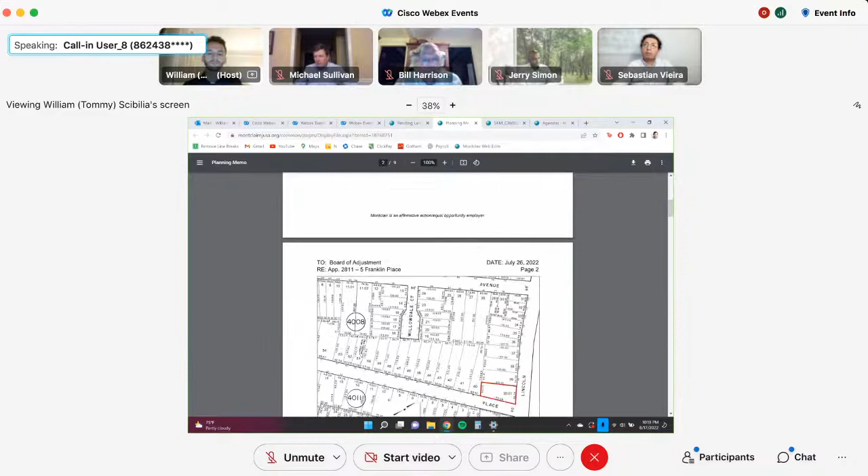5 Franklin Place, as you see on the survey, is a corner property. The front of the house faces Franklin Place. However, what we use as our side yard actually faces Lincoln Street, which makes it a front yard per township regulations. This is why we're also proposing, and have already begun, to add evergreen landscaping to cover the generator if the proposed variance is approved.

In addition, we are pleading hardship because we really have no backyard in which to legally locate the generator, given the proximity of the building to the property line, as well as the requirements of the generator itself, such as a minimum of 5 feet from any window or door.

Indeed, there is only one section of our property where a variance would not be required. However, township regulations and generator requirements would place the generator where a structure already exists—a gazebo that was built as an integral part of the property's original construction.

If you look at the survey, ladies and gentlemen, the gazebo is actually shown—picture 6 of 6 gives you the picture of the gazebo. And on the survey, it's in the bottom left-hand corner. If you see that structure, the gazebo. Yes, we see it. In any event...

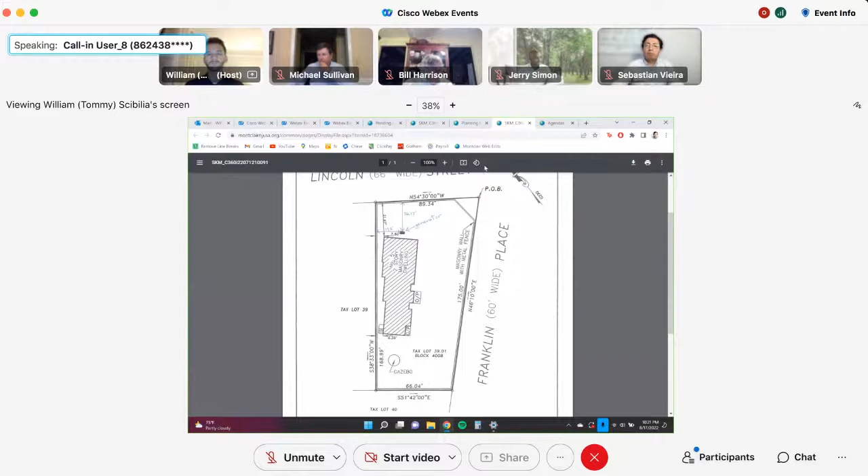Having no legally acceptable or practical location to place the generator, we chose the proposed location because it offers several benefits. First, it is an open space that offers the best air circulation, therefore mitigating risks from carbon monoxide emissions from the generator, not only for us, but also for all our surrounding neighbors.

Second, we want to continue to be good neighbors. Proposing a variance for the backyard or the opposite side of the building places the generator closer to both of our nearest neighbors' living spaces, as well as areas where our neighbors normally gather with their family and friends.

Third, the Lincoln Street side of the house—that is, the wall behind the generator—is our garage. So the generator would be away from our family's living space. And last but not least, our main electrical panel and gas meter are on the Lincoln Street side of the building, which lowers the generator's installation cost.

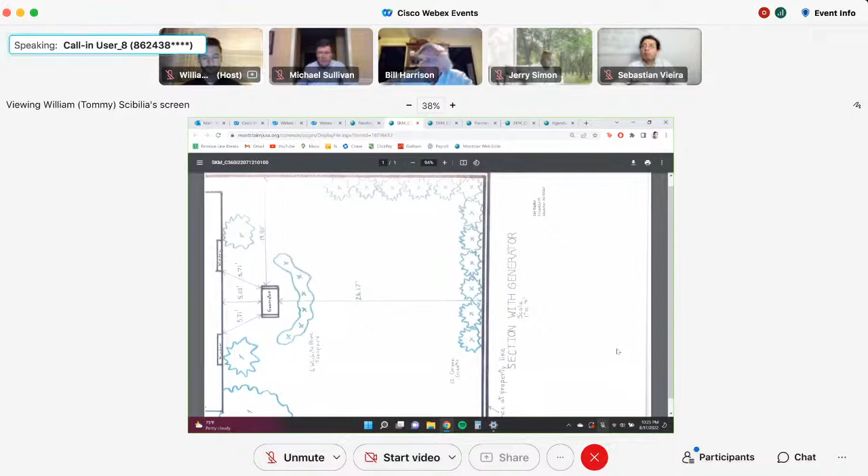That concludes my presentation, and I wonder if any of the members of the board have questions. Okay, Mr. Moore, do you have any questions?

Mr. Moore? We will come back to him.

Mr. Simon, do you have any questions? Yes, I just want to confirm that the generator will be powered by natural gas. Yes, it will be. Okay, that was my only question.

Thank you. Mr. Vieira, do you have any questions? The question I have is, do you think the generator will be visible from Lincoln Street looking at your house? We do not want the generator to be visible. We intend to provide cover for that generator, and the cover will take the form of evergreens.

And have you looked at the generator specifications as far as dimensions, so it will be in line with what you're proposing? Yes, sir, we have. In fact, the picture that Tommy has in front of you now includes the evergreens that have been planted since our original application was submitted. So you'll see that we have begun to provide the cover for that generator, for the variance that we're proposing, rather.

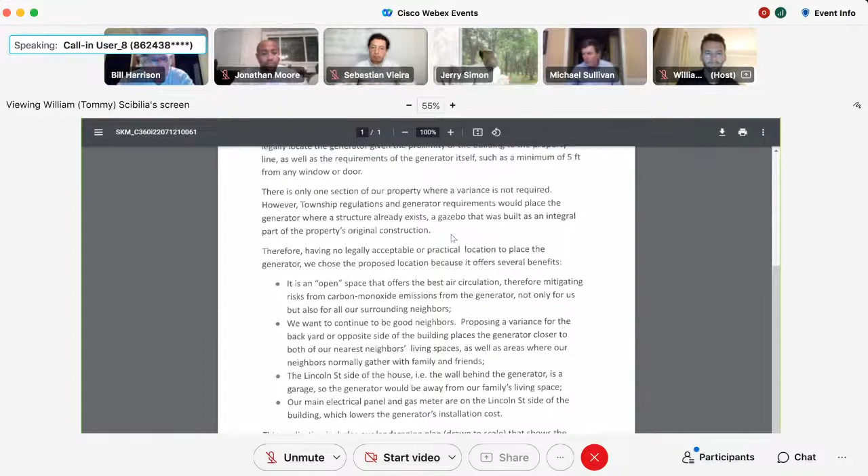Okay, I just have a couple questions. Do you know what the distance is between your house and the gazebo?

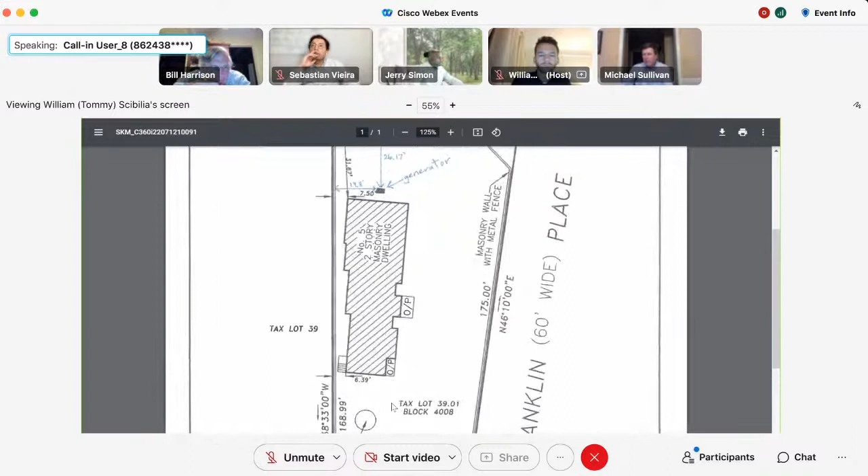Very interesting, sorry, I actually don't have that measurement. I apologize. And behind your house, between the gazebo and the house, is there a walkway leading around to the narrow side yard of the house?

No, there is a walkway actually that goes from the front courtyard and down the rear side of the house. And that's essentially where the walkway ends, is where you see those steps.

The path that you see actually goes toward that fence, the concrete fence, and then it essentially ends there.

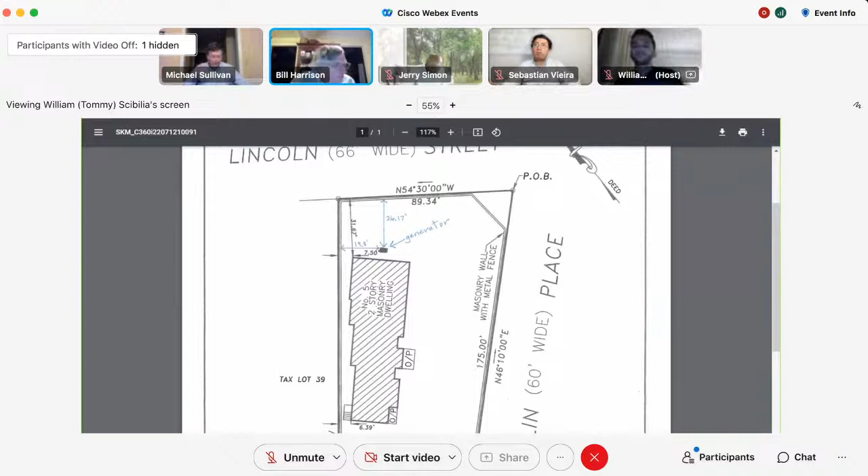Ms. Taylor, you had indicated that you thought some of your neighbors were going to testify in support. Do you know if they've called in? I do not know that, sir.

They are the neighbors. We asked our neighbors at 88 Lincoln Street, which is the property right next to ours, and specifically they are the property most negatively impacted by the placement of this generator. So we thought it was very important that if they had a concern, we work with them to mitigate it, as it's important to us to get along with our neighbors. So we have them on, but I don't see that they're speaking.

One last chance, if you have any questions, statements, testimony, or comments on the application, if you're on, speak up now. You've had ample opportunity to call in, but if you were in the midstream, we'll wait a little longer, or dial real quick.